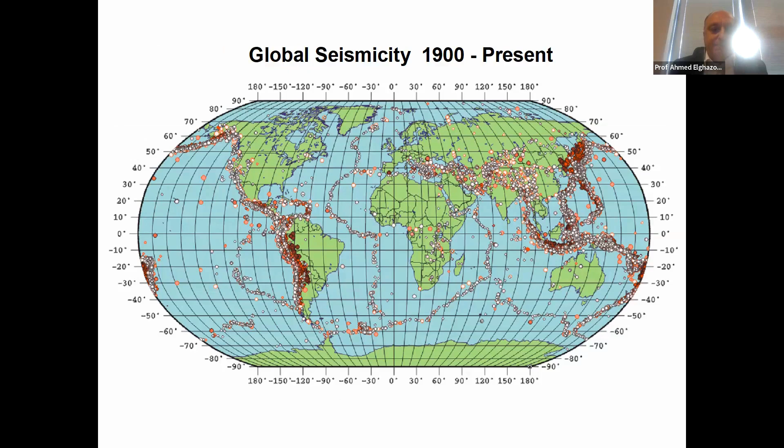I'll start with the hazard side, to see how we work out the loads that we design for in codes of practice. If you look at global seismicity, this is a map showing notable earthquakes that have happened over many years since 1900. You'll see that large earthquakes are clustered around what we call plate boundaries. The earth's crust consists of relatively rigid plates that move relative to each other, and large earthquakes happen at these boundaries, though notable earthquakes can also occur within the plates themselves.

But typically the very large ones occur at the boundaries. So why do we get earthquakes? If you look at a cross-section of the Earth, you will see it consists of different layers with different density and temperatures, and there are always materials continuously going from the inside of the core to the outside. As they get cooler, they try to go back inside, creating currents that cause tension, compression, or movement at the surface.

And that is the problem where this movement is held. You tend to build a lot of energy. Once you get this fracture over faults, you start generating quite a lot of energy, and this is expressed in terms of vibrations that translate over large distances.

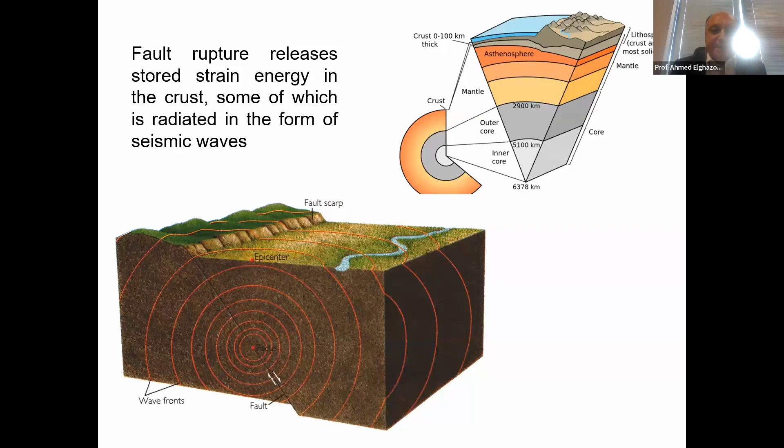This figure on the left shows a typical fault situation. This is the source here, and typically what we see on the surface is the fault scarp. Sometimes we don't really see the fault on the surface and it is buried inside. But what happens if you look at a typical fault situation?

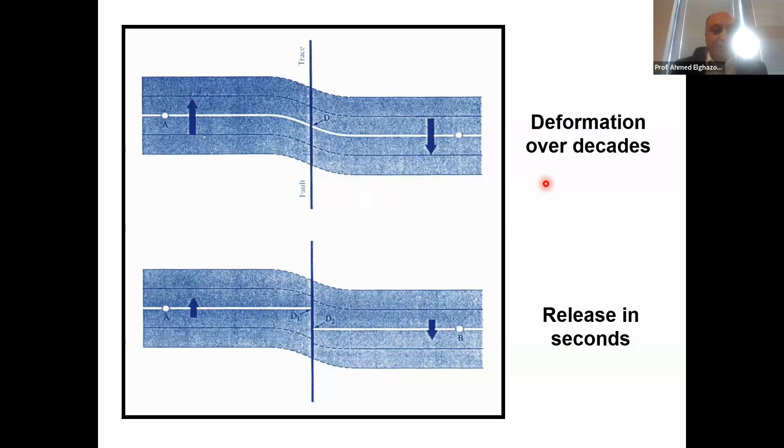In the top figure here, you start building this elastic energy within the fault. Then when it reaches its capacity, it snaps and releases very large amounts of energy within seconds. So it's built over decades, but then it is released in a few seconds, and that is the main mechanism of earthquakes.

Now, in many cases, you see it at the surface like this. Sometimes you have a vertical shift of a few meters, but the fault itself might be extending over tens or hundreds of kilometers. The larger this break within the fault, the larger the amount of energy, and the amount of energy is related to the magnitude that we characterize the earthquake with.

But it's important to realize that the magnitude is related to the event itself and not where you measure the vibrations. Of course, the vibrations will reduce as you go away from the source.

So what seismologists will typically do is study these mechanisms of earthquakes. They look at the nature and location of these earthquake sources, the frequency and magnitude of events from a particular fault source, and the likelihood of a certain magnitude occurring within a certain number of years. This is what we refer to as the magnitude frequency relationship for the source.

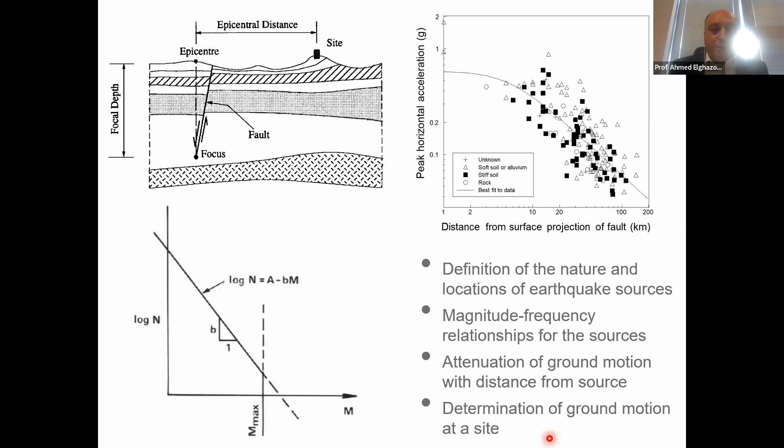As you go away from the source, if you're interested in a particular site, you get attenuation with distance, so vibrations tend to reduce as you go further from the source. But the degree of attenuation depends on the travel path, the soil conditions, and the topography of the site, among other factors that influence attenuation or, in some cases, magnification. At the end of the day, if you do this assessment for a particular site, you can determine the expected ground motion there.

Now, in many cases, your site will be influenced by more than one source, and hence you will have to do a probabilistic seismic hazard analysis, where you look at the possible influence of several sources and predict the hazard based on their combined influence. That's what we refer to as probabilistic seismic hazard analysis.

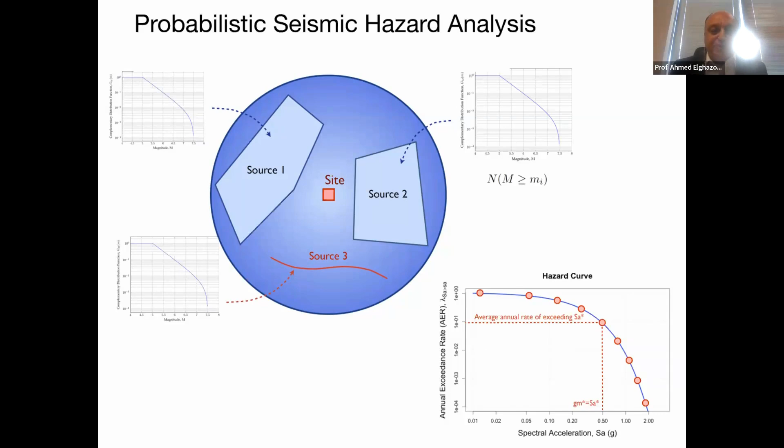If you have a very important structure that you're designing, you would actually have to do this kind of exercise for the site. But for the vast majority of normal structures, codes try to simplify the situation by doing the hazard assessment for a particular region in advance, then giving you seismic hazard or microzonation maps, which give the expected maximum accelerations for a region based on its location within the map. So things are quite simplified for normal, typical structures.

But I have to say that this is very, very uncertain. Seismic hazard assessment has a lot of uncertainty in it. What I'm showing here is a slide from a very well-known benchmarking exercise, where they got 13 experts to work out the peak horizontal acceleration at a particular site and the annual probability of exceedance of these accelerations.

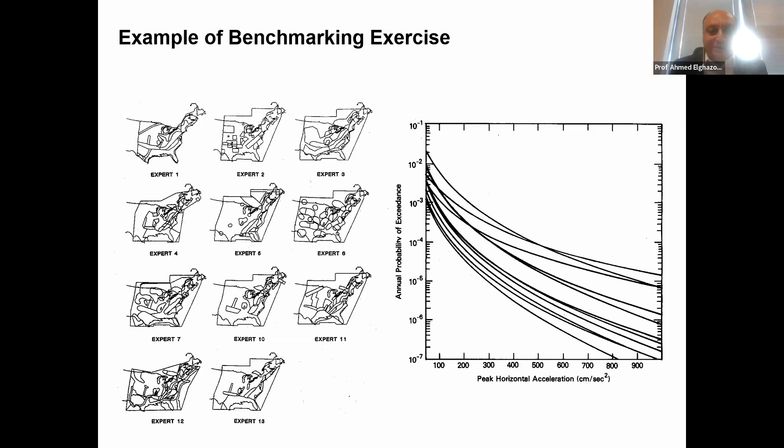You will see vast differences, maybe 2, 3, or 4 times difference between these different experts. So we are dealing with something highly uncertain. Hence, when doing our design concepts, we have to take into account this uncertainty in the loads we are predicting due to earthquakes. It's really important to realize that seismologists do their best in terms of predictions, but there are very large uncertainties.

Now I want to say a few words about Hong Kong. I haven't been there for a long time, but you hear a lot about the seismicity of Hong Kong, and there's lots of debate about the level of seismicity. It's clear that it is low to moderate. I'd say, in terms of risk, it's a moderate level. The estimated peak ground acceleration for an earthquake that might happen every 500 years is around 0.12g, which according to typical seismic codes is a moderate level of hazard—not low, but within the moderate level.

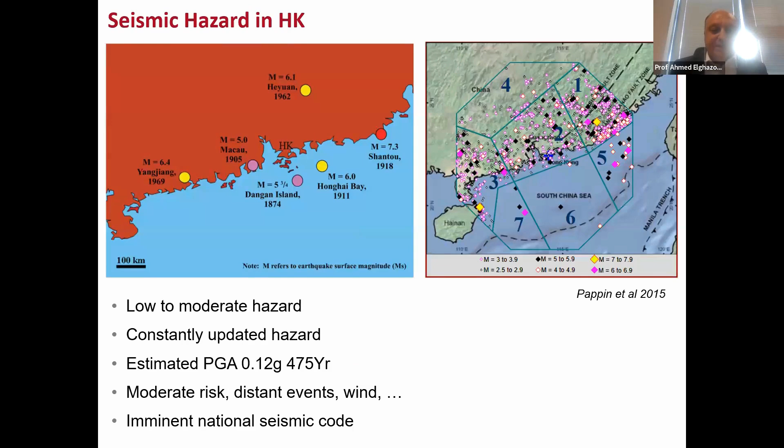My understanding is that there is a national seismic code likely to be issued quite soon, but there are quite a lot of issues involved. What I can say is that the hazard is not insignificant. It needs to be taken into account, particularly for important structures.

Now, having said all that, it's important to emphasize the importance of soil conditions. If you're at a site and looking at the underlying soil below the structure you're considering, the soil conditions play a very important role.

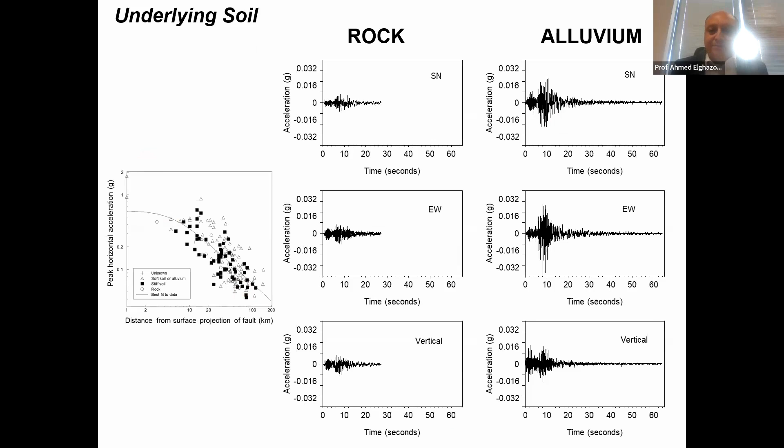What I'm showing here on the left and right are the measured accelerations, or vibrations, at very close sites, just a few meters from each other—one on rock soil and one on soft soil or alluvium. If you look at the accelerations, they are orders of magnitude different between the rock and the alluvium, because of the magnification effect you get from softer soil conditions. Although you get significant attenuation with distance from the source of the earthquake, the soil condition can amplify this quite significantly, and that can make a massive difference to the behavior and the loads acting on the structure.

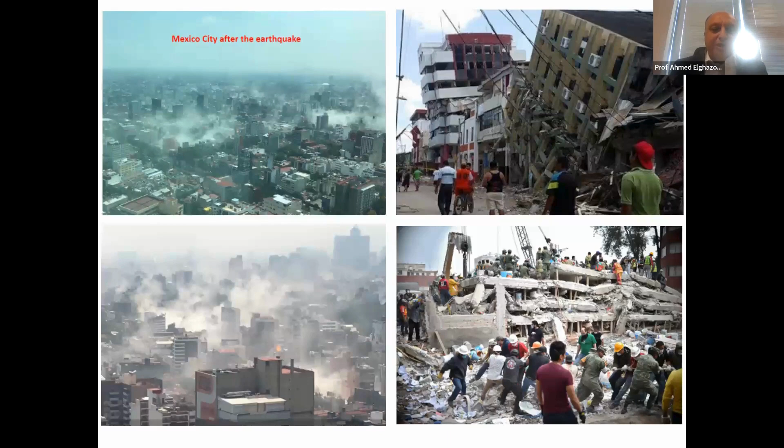A typical example of this effect is what happened in Mexico City. There was a very large earthquake in 1985, during which a lot of buildings were damaged. The important thing is that Mexico City is built on an area filled by soft soil in an old lake, so there's very soft underlying soil conditions which magnify the accelerations quite significantly. Interestingly, the 1985 earthquake was almost repeated on the same day in September 2017, with very similar levels of damage occurring again. It's a well-known effect that happens in many parts of the world.

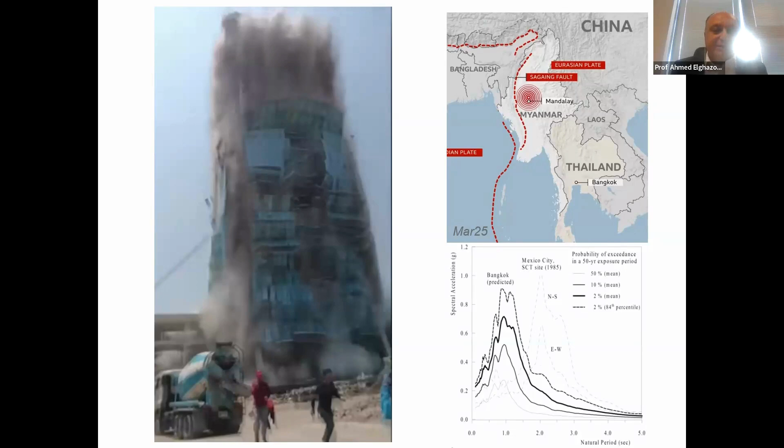Probably another close example in our memory is the collapse of a building in Bangkok in March this year, about 1,200 kilometers from the earthquake that happened in Myanmar. At 1,200 kilometers, you wouldn't expect significant seismic accelerations, but because of relatively soft soil conditions, there were very significant magnifications of the accelerations within this building—coupled with a lot of vulnerabilities in the structure. There were many issues in terms of design, materials, detailing, and so on, that led to the collapse of the structure.

At the end of the day, through networks we can measure strong motion in terms of acceleration, velocity, and displacement at locations distributed depending on where these instruments are. We can determine exactly the accelerations in the 3 directions—the 2 horizontal directions and the vertical direction. Typically, the vertical component isn't that important for design unless it's a very large earthquake and you're relatively close to the source, and also depending on the type and configuration of the structure. In any case, we have very good measurements now, and very large databases giving us what kind of earthquake strong motion records are available in different parts of the world.

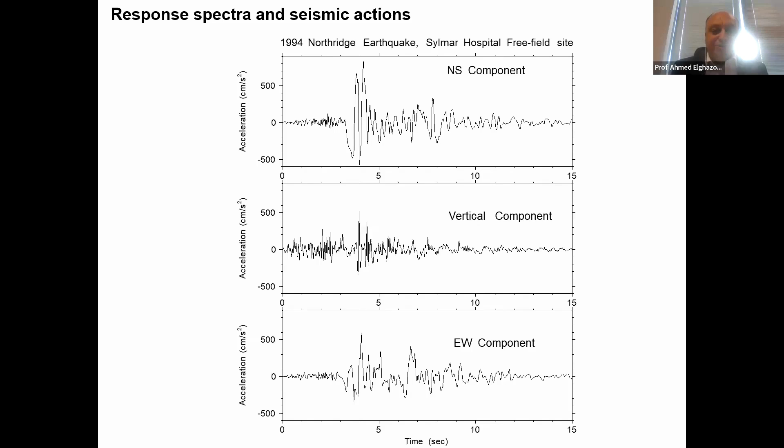Of course, the problem is we don't know the earthquake in advance, and we have to rely on a lot of predictions in order to work out what is likely to happen in a certain region.

While you can measure the accelerations in terms of the history of the acceleration, it is very convenient for simplified design to work out the forces based on what we refer to as the elastic response spectrum. If you know the acceleration record, you run a single degree of freedom system with different periods of vibration, look at the response, and plot the response acceleration against the period of vibration. You will get this elastic response spectrum.

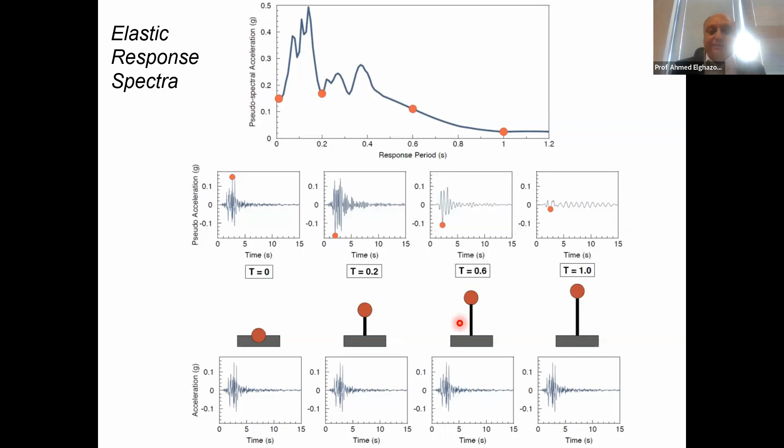That response spectrum is for a particular level of damping within the structure, and it assumes a single degree of freedom. Of course, real structures are rarely just a single degree of freedom, but it gives us a very good idea about the frequency content of that particular earthquake record. But again, this is if you know the record in advance.

So the acceleration response spectrum is quite useful in design. It really reduces the problem from a complex record of acceleration, velocity, or displacement into something much simpler. It takes into account the maximum acceleration, and in a way, the frequency content. However, it does not take into account the duration and the number of cycles.

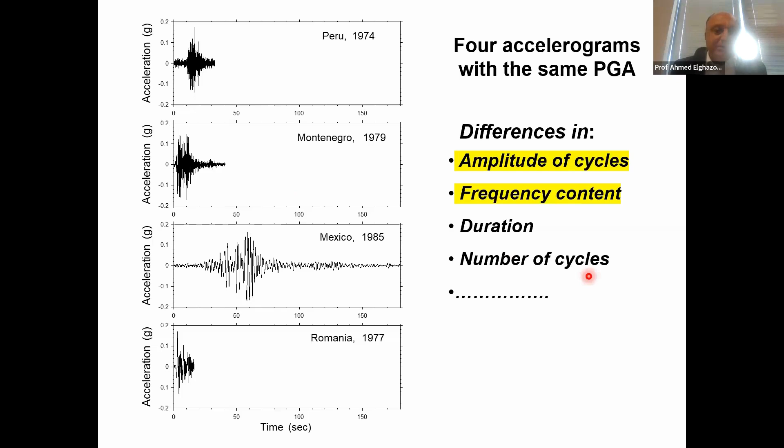What you see on the left here are 4 records of acceleration, measured records. They all have the same peak ground acceleration, but very different nature in terms of frequency content, number of cycles, and duration of the record. This probably becomes less important if you are looking at elastic response. When you get into nonlinear inelastic response, these kinds of effects are very important.

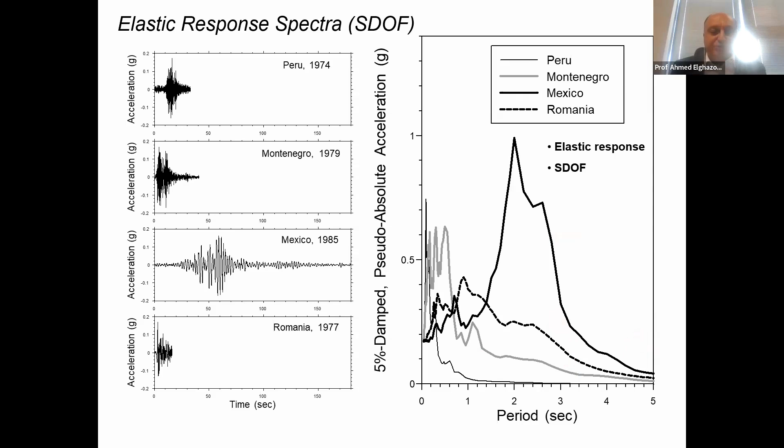Now, just to show you how these 4 records will look like in terms of the response spectra. These are the 4 elastic response spectra for a single degree of freedom system in response to these records. You can see that the spectrum captures, to a large extent, the frequency content depending on the period of vibration of the structure.

So the benefit of having this elastic response spectrum is clear: if you have a single degree of freedom system like this, you know the mass, you know the stiffness, and assuming you know the level of damping in the structure, then knowing the period, you can go and work out the response acceleration, which takes into account the magnification due to the dynamic response of the structure.

So the peak ground acceleration is magnified or attenuated depending on the frequency of the structure. The benefit is that you can then reduce the dynamic problem into an equivalent static problem by taking the peak ground acceleration, say from a hazard map, and magnifying it through the spectrum, assuming you know its shape.

By multiplying this spectral acceleration by the mass, you get the equivalent static force, which is equivalent to the reaction that is applied. So the vibration at the base is equivalent to the inertial force, or the equivalent static inertial force applied on the structure. So it does simplify the problem quite a lot.

The evolution of seismic codes has come effectively from this. At the very beginning, maybe 100 years ago, people were designing based on experience, and then it became taking a proportion of the weight and applying it as a lateral load. With time, they started taking into account the shape of the magnification, or the shape of the spectrum, and then it became more and more sophisticated, taking into account other aspects.

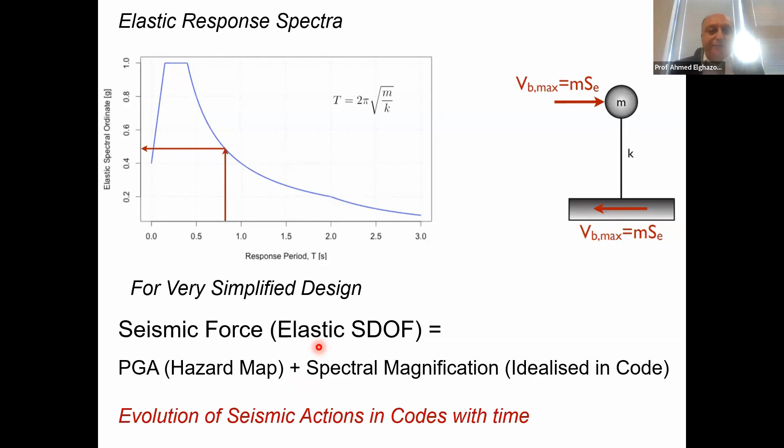If you look at any seismic code now, you'll see how it takes into account the fact that the structure is multi-degree of freedom, not single degree of freedom, and how it accounts for the structure not being elastic—it can involve nonlinearities and inelasticity and so on. But the essence of it really comes from what I'm showing on this slide.

So enough on the hazard side, and I hope it's given you a very brief idea of what we do in order to work out the loads on the structure. I'm going to focus more on the vulnerability side, and how, knowing the loads on the structure, we actually try to design structures in order to minimize the seismic risk.

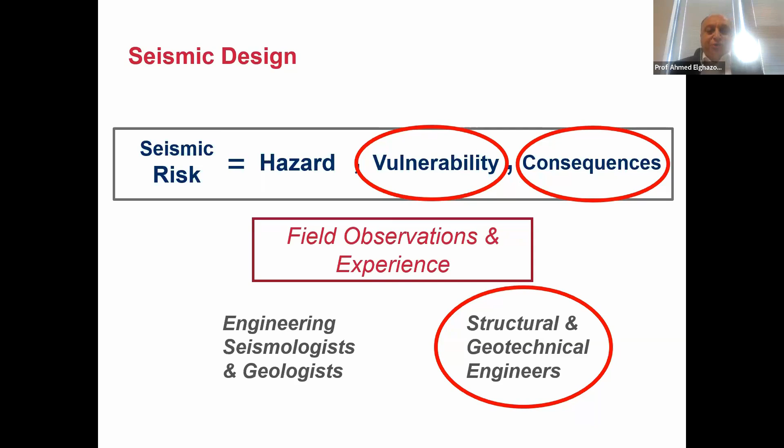And of course, we learn also from what happens to structures that behave very well. So when we go to the site after an earthquake, we don't only look at structures that are damaged, we also try to understand from structures that have behaved well during an earthquake.

And of course, we have to look at existing structures and how we can upgrade them in terms of strength, ductility, and so on. It's really important to emphasize that a lot of existing buildings have not been designed for any seismic code. Seismic codes started in a proper form maybe in the 1950s and 1960s, and then got introduced in other countries in the 70s, 80s, 90s, and even later. So there are a lot of buildings and structures that have not been designed properly and need to be upgraded all the time.

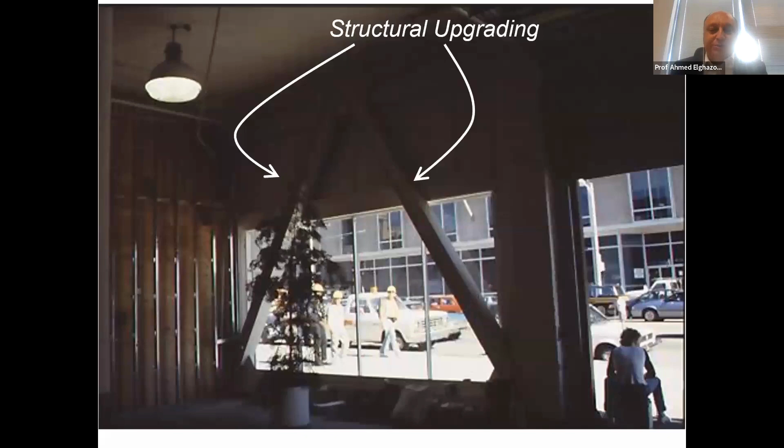And we also upgrade our codes, and we need to improve how structures perform under these new and upgraded codes. And of course, it's not only about buildings. We need to look at bridges. We need to look at implications of earthquakes in terms of landslides, in terms of liquefaction of soil. Fires typically occur after large earthquakes because you get failure in gas pipes and at the same time failure in water pipes, so you need to look at situations where fires are likely to occur after an earthquake. Even avalanches in some cases would occur because of earthquake effects.

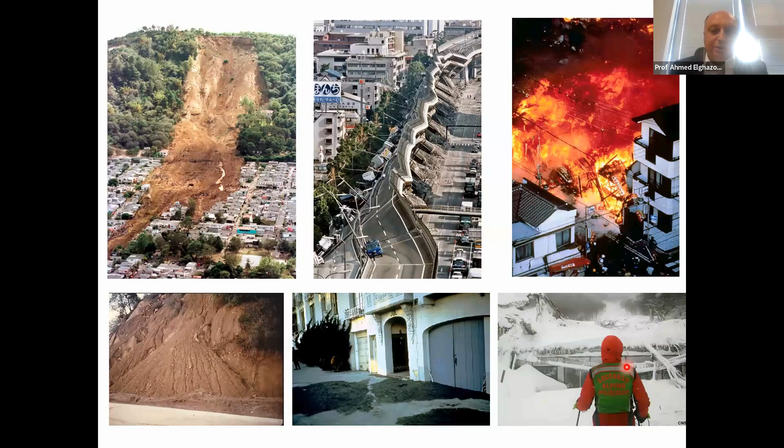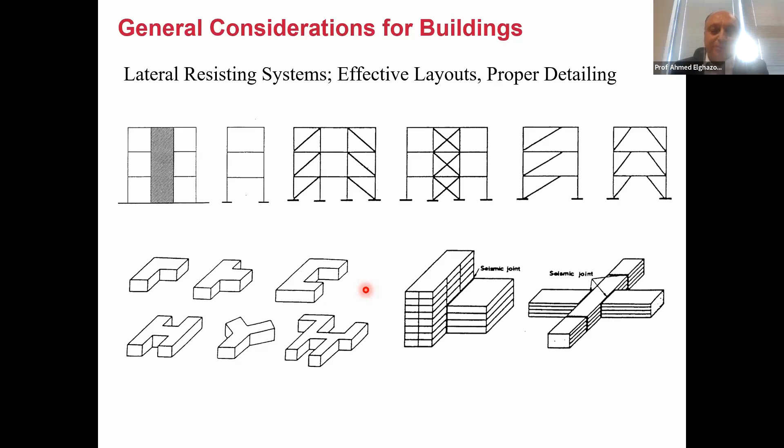Now, before I start looking at codes and what kind of concepts we adopt, it's probably important to say that a lot of the seismic resistance you build into structures, you can get initially without doing any calculations by following good practice - making sure you have a proper lateral resisting system in all directions of the structure, whatever this lateral resisting system is, and then trying as much as possible to follow relatively simple layouts. If not, codes will typically penalize you by asking for more detailed analysis and more involved design to satisfy the requirements. So we can design any structure, but if you use a relatively effective layout, it will make your task much easier from the very beginning.

Now, because we are dealing with loads which are quite uncertain, and we are also looking at probabilities of occurrence, what kind of return periods are we looking at? We need to look at that in a probabilistic sense, considering different situations. A typical situation is that we look at probability of occurrence for a design earthquake of 10% in an exposure time of 50 years, which translates according to a simplified Poisson's distribution as around 500 years - an earthquake that happens once every 500 years. In some codes, you start from an earthquake that happens 2% every 50 years, or 2,500 years. It really depends - the concepts are very similar, but your starting point might be different. You can start from a small earthquake and build upwards, or start from a large earthquake and build downwards. So the typical probabilities or return periods used are either 500 years or 2,500 years. Other seismic codes around the world might use different values.

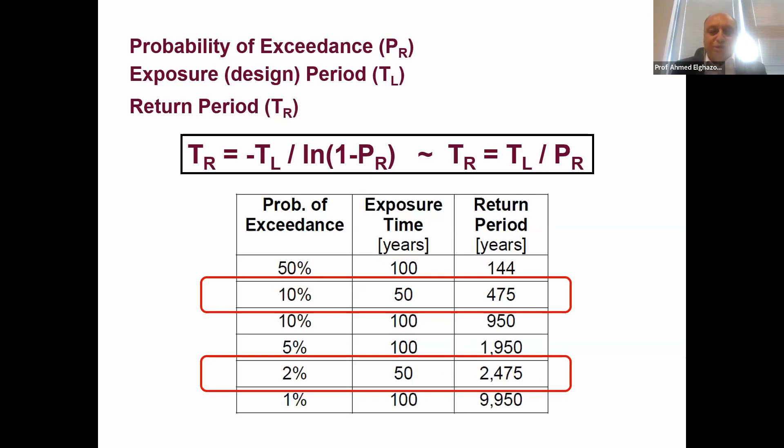So I'm going to start with what is typically referred to as performance-based seismic design. Now, this is not exactly what is in the codes - codes are much more simplified than this. Sometimes, if it's an important structure, we might follow a performance-based seismic design, which basically means we have to have a very clear understanding of what performance levels we are designing for, and also an understanding of the design earthquake or earthquake design levels we are dealing with in terms of return period or probability of occurrence. Codes, as I said, will inherently take that into account, but without sometimes being transparent about what assumptions are being made.

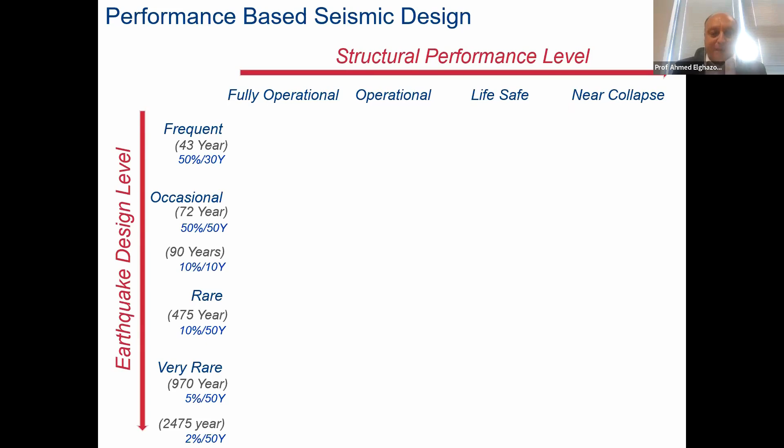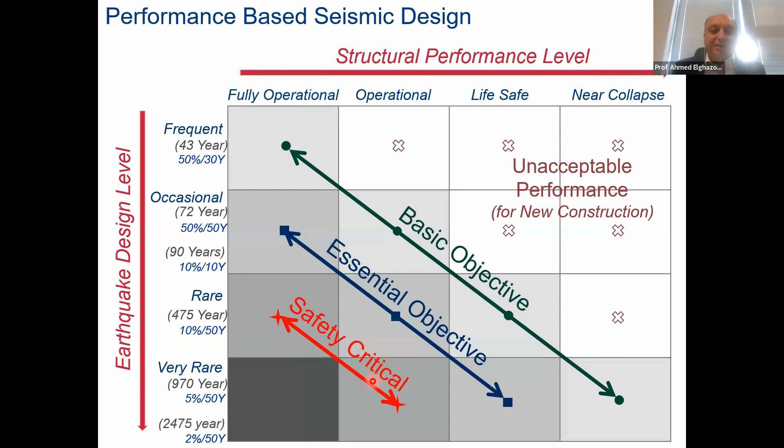This is transparent in performance-based seismic design, and it's a choice made by the designer, typically in consultation with the client. Codes, of course, will simplify that, as I'll show later on.

Now, how do we really translate that into structural performance? Under seismic loading, assuming a relatively simple structure, you have vibrations going in both directions. They are cyclic at the base, equivalent to inertial loads applied at the masses within the structure. So the load versus displacement response is what we call hysteretic cyclic response, and the area inside that is the energy dissipation within the system. But we often simplify that by looking at the envelope response, sometimes referred to as the equivalent static response.

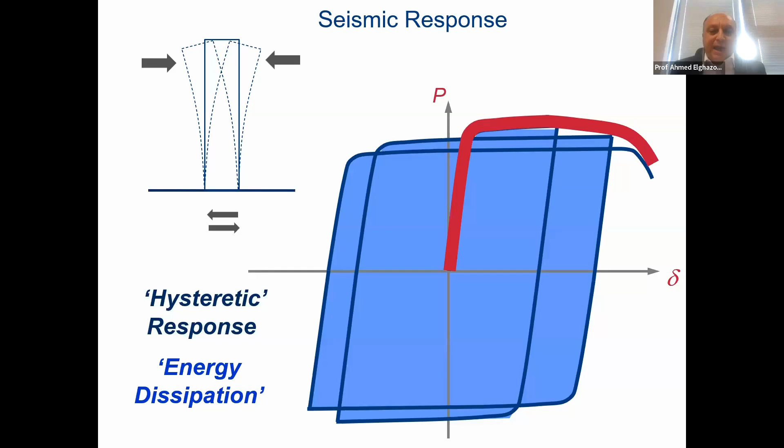We can represent this performance-based design in a figure like this: if you're pushing the structure at the ground in this direction, it's equivalent to an inertial load applied at the masses, and you can look at the deformation against the reaction at the base. As discussed before, for a relatively small, frequent earthquake, you make sure the structure stays within the linear elastic range. For a larger earthquake, you might allow some damage, maybe cracking of concrete and yielding of some steel. As the earthquake becomes larger, you might allow the structure to go into this level, but that comes at the expense of damage.

That means there's a cost in terms of replacement, a higher risk in terms of casualties, and a longer interruption of business while repairing the structure. If you don't want any of this, you have to make sure it remains linear elastic even at a very large earthquake, which is not very efficient — and it also cannot be guaranteed because we're dealing with very uncertain situations.

So there's a lot one can interpret from a figure like that. Now, code practice will simplify the situation, targeting essentially one of these levels, depending on the code. Different codes might follow different approaches. The typical one is to follow a life-safety approach for a 500-year return period earthquake, but then you do checks to see what happens at larger events and at smaller events.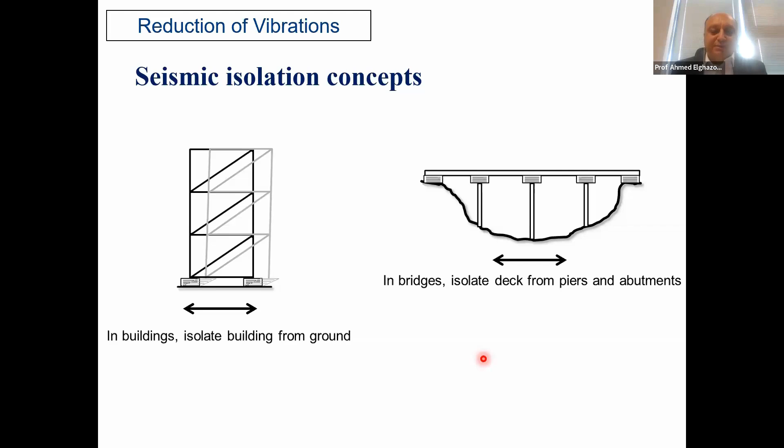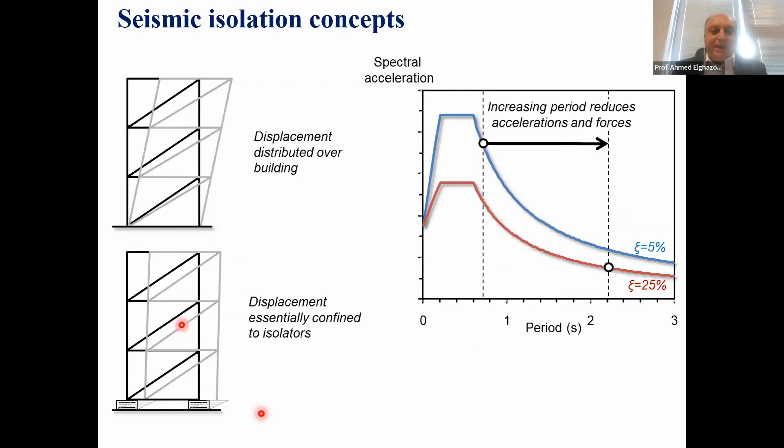The whole idea is that you are trying to isolate the superstructure from the vibration on the ground. Effectively, what you're trying to do is shift the vibrations within the structure from the areas that are likely to resonate and provide significant magnification of the loads. So you are basically increasing the period of vibration of the structure by having this flexible system, and hence reducing the magnification within the structure.

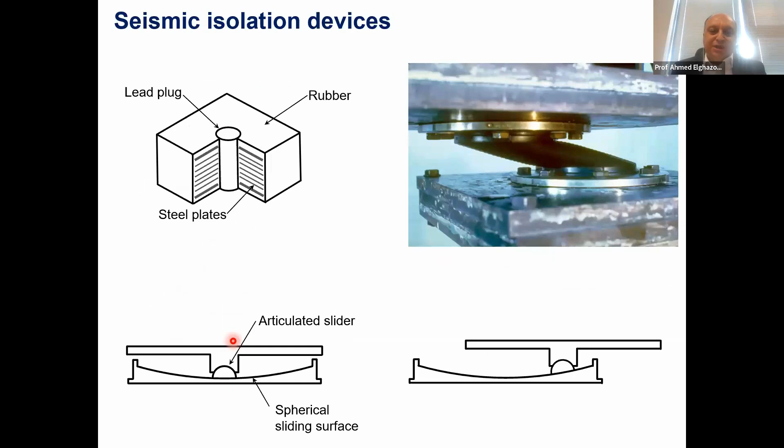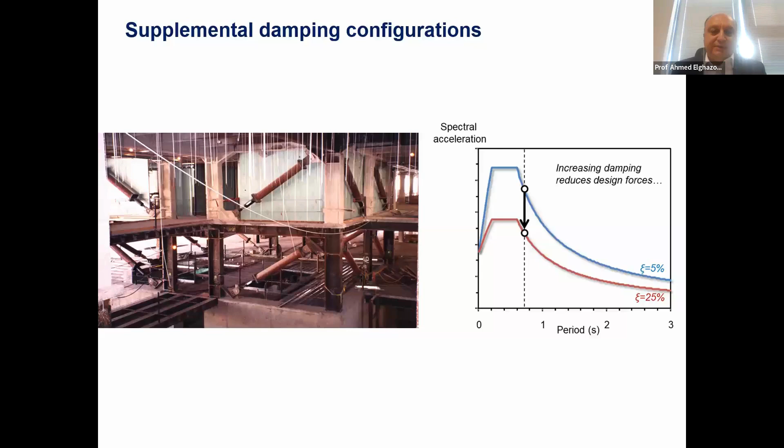These are some examples of isolators: rubber isolators with lead plugs, friction sliders, and so on. There are many other types of systems. You can also use supplemental damping systems, which increase the effective damping in the system. There are many other types I wouldn't have time to go through now, such as mass damping, and other active and passive vibration control systems, which get a bit more specialized.

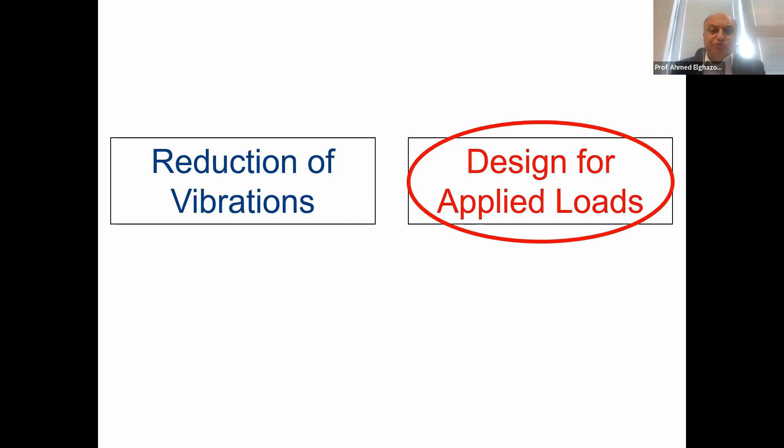Now, if you're designing for the applied loads, which is the more common approach, then what you will try to do, as I mentioned, is follow this approach where for relatively frequent events, you make sure the structure remains at very low levels of damage. If you go for a rare or unlikely situation, you might accept some damage in the structure, at the cost of significant replacement cost or interruption, and so on.

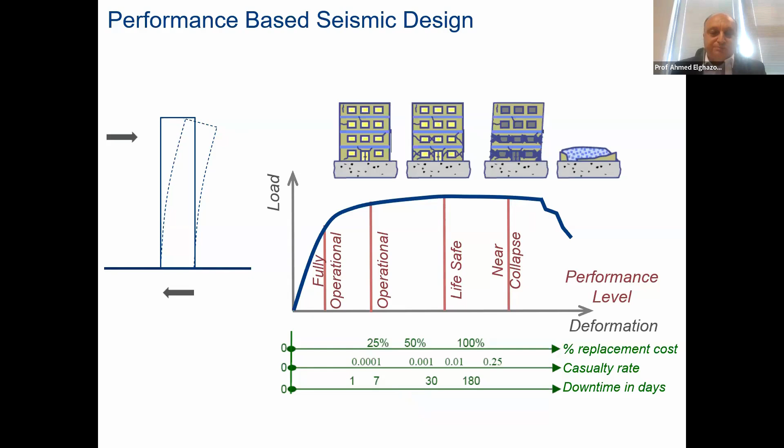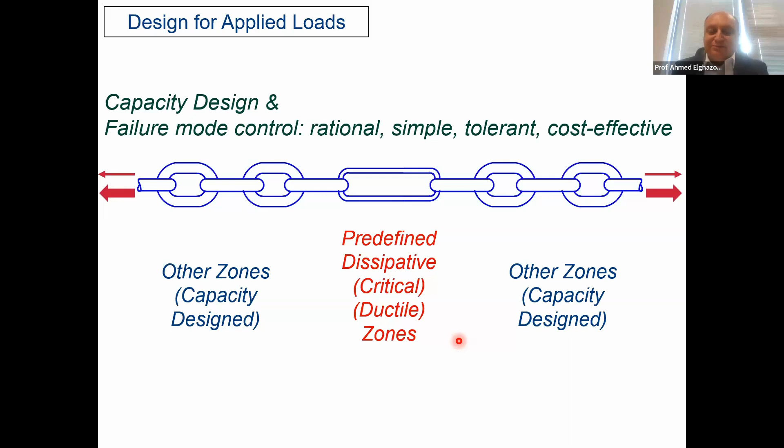All the other elements are capacity designed, meaning they are designed for the maximum possible forces that can be transferred from these ductile zones. So it is an efficient, simple, and cost-effective approach, but it makes sure you apply the capacity design approach properly, with ductility provided within the areas where you can dissipate energy. This approach was developed in the 1970s in New Zealand and then started being applied to other types of structures. It is now the common approach used in seismic codes all over the world.

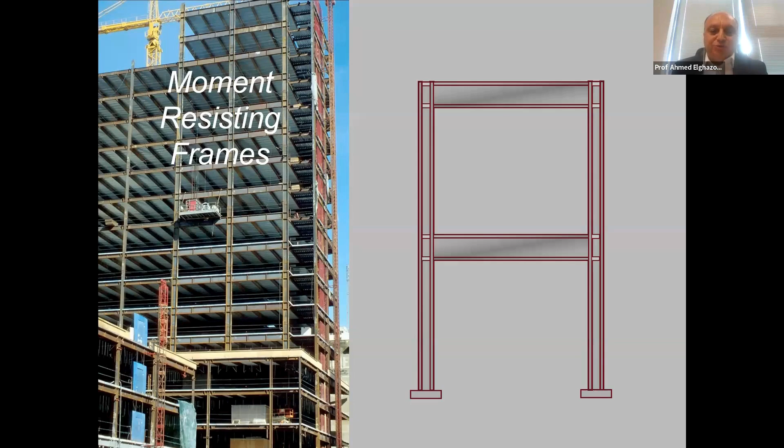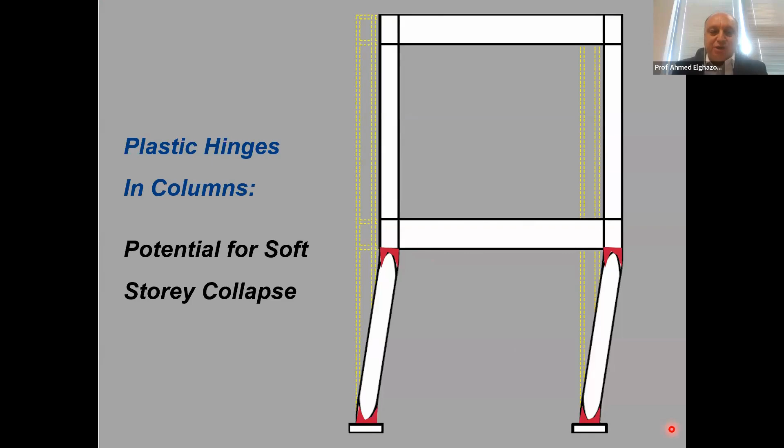So for example, if you have moment resisting frames as a lateral resisting system, what you try to do is make sure your dissipative zones, or critical zones, are at the ends of the beams. Everything else is capacity designed, and that's the plastic mechanism you are designing for. You avoid having a situation where you get plastic hinges at the ends of the columns, because that can lead to soft story behavior and early collapse of the structure.

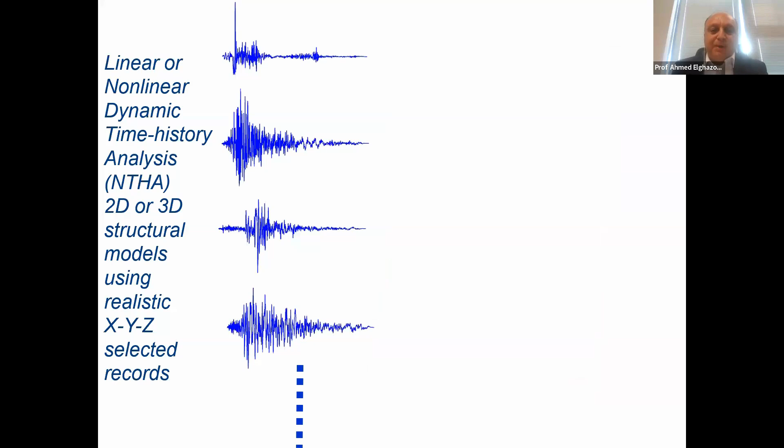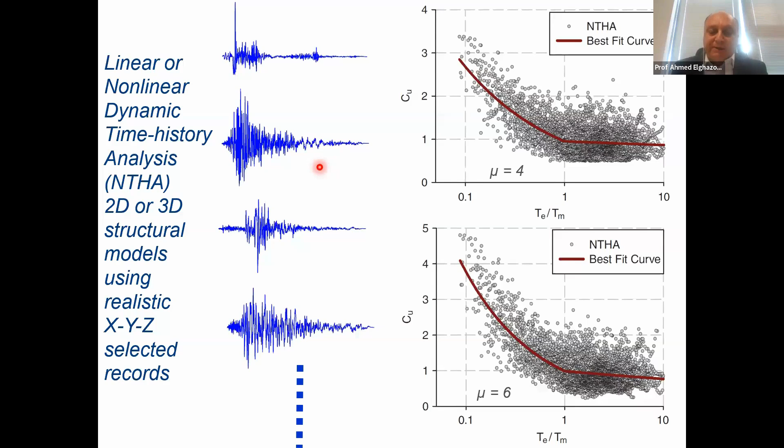In research, we do quite a lot of detailed time history analysis, dynamic analysis, which is time consuming, but it allows us to come up with simplified approaches that we can use for typical structures in normal practice. So in typical structures, we normally wouldn't do nonlinear dynamic time history analysis. We simplify the situation a lot based on calibrations done on a lot of analysis, but for important structures, we might still have to do verification using nonlinear dynamic analysis.

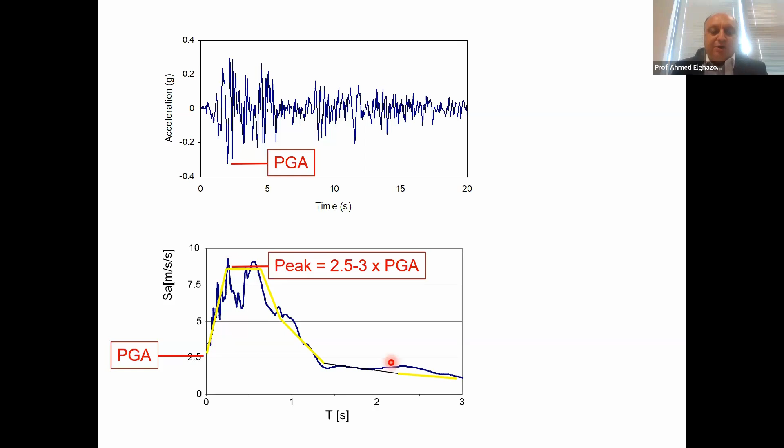As I mentioned before, because we don't know the earthquake in advance, what we come up with in the code is a response spectrum, represented by this yellow line here, which is an idealization of the expected shape of the spectrum you are likely to get in that particular region. So it is all simplified, but it is calibrated properly based on a lot of detailed analysis.

Now, the other thing you need to take into account is that in practice, you don't want to do nonlinear analysis. So how do you take into account the fact that you are allowing ductility and inelastic behavior in the structure? This is what we refer to as a behavior factor, force reduction factor, or force modification factor, depending on the code you are using.

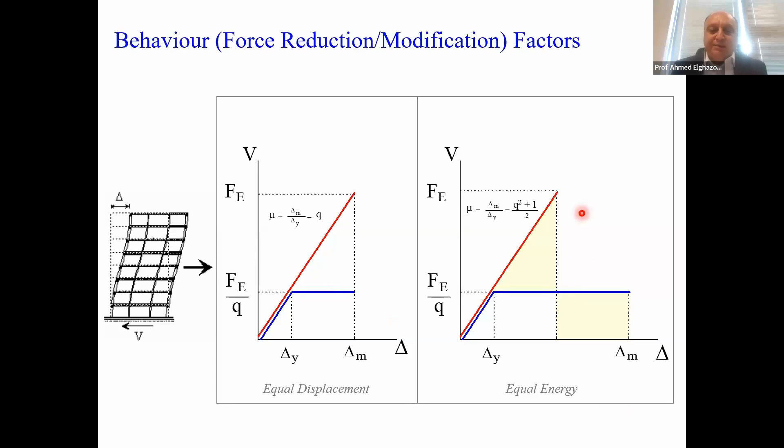This is really a simple approach, very crude but calibrated for typical structures, where rather than designing for elastic forces, you design for smaller forces, and make sure you account for the ductility demand that results from designing for smaller forces than the elastic forces induced in the structure. This is embedded in normal practice, and effectively, instead of designing for the elastic response spectrum, you can design for smaller loads, provided you take into account the ductility demand arising from this. So effectively, you are designing for smaller forces, and hence you get a more effective design.

So at the end of the day, for the rare event, for the design earthquake, if you are in relatively high seismicity, it doesn't really matter too much if you are in low seismicity. If you are in high or moderate seismicity, you need to provide ductility in the structure. So how do you provide ductility? Again, the codes will give you a lot of information and detailing requirements to make sure that you have enough ductility, consistent with the level of reduction of forces taken in the design.

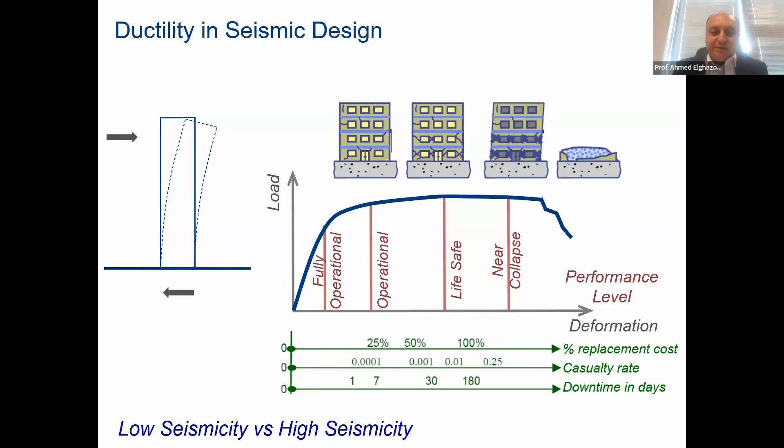I wouldn't go into great detail because of time, but if you are dealing with a reinforced concrete structure, for example, you need to make sure you prevent shear failure because it's brittle, sudden, and doesn't really provide a lot of ductility. You have to make sure beam to column joints are properly detailed because they can be quite vulnerable. You need to make sure you are providing adequate detailing - forget about seismic, proper detailing in principle in terms of anchorage, joints, concrete quality, and so on. Concrete confinement is very important because it is one of the key parameters that provides ductility within a concrete element.

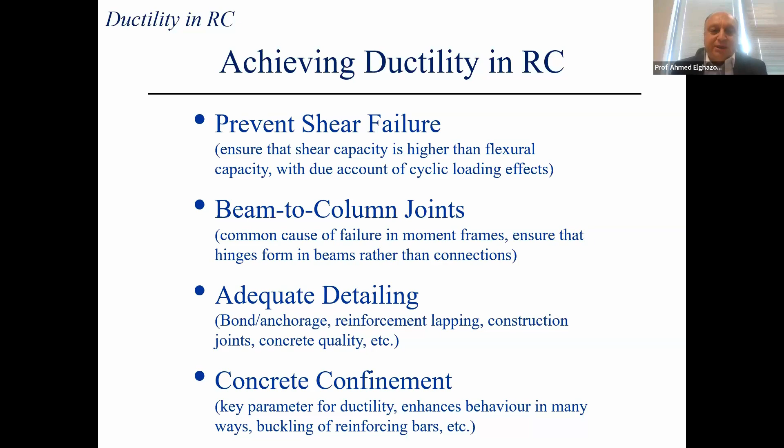The same again for steel. There are certain things you have to follow in order to make sure you have ductility, make sure you have proper detailing of connections. Welded connections have been shown to be quite vulnerable, and it has resulted in significant changes in seismic codes of practice in recent years. You have to make sure you avoid early occurrence of local buckling, because it is very likely to be followed by low cycle fatigue fracture under cyclic loading. Bracing members can be vulnerable because of overall buckling combined with local buckling, and also issues related to connections of bracing members. So all these are very important in order to provide sufficient ductility within the structure.

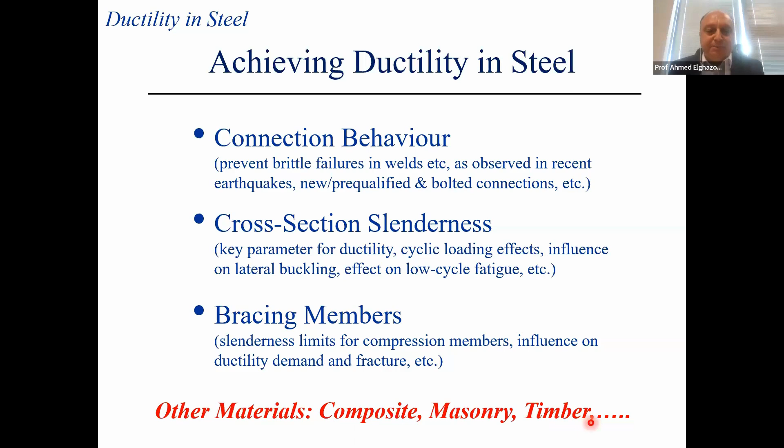Of course, I can go on in terms of composite structures, masonry, timber, and so on. Codes of practice, depending on which code you are looking at, will give you information on these as well.

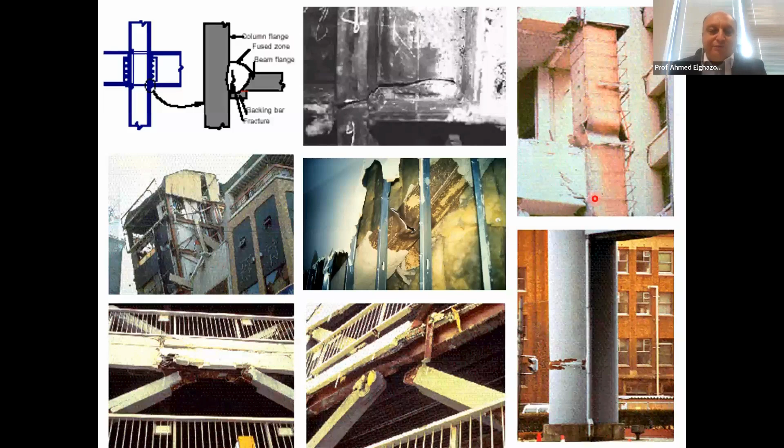Again, these are some implications of not having enough ductility in steel structures, in terms of fracture due to local buckling, failure of connections, failure of braces, and so on.

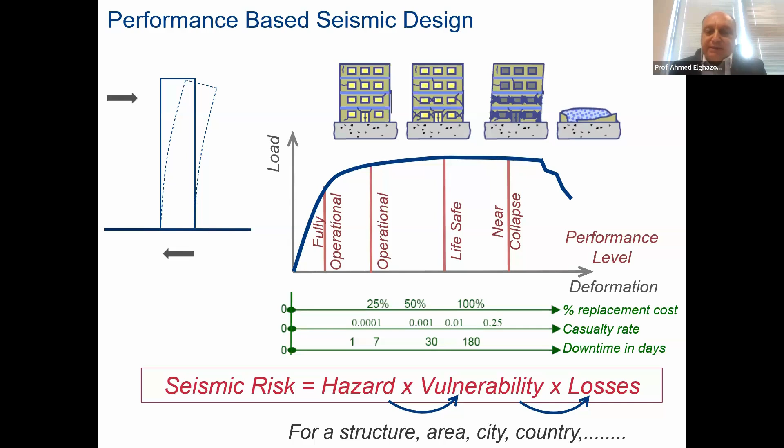Now, another thing to highlight is that when we are dealing with risk, we are not necessarily only dealing with a single structure. Sometimes we are looking at an area, a region, a city, or trying to assess risk in a country. We do a lot of these studies in terms of loss assessment due to possible earthquakes. I'm just going to show you an example from my home city of Cairo.

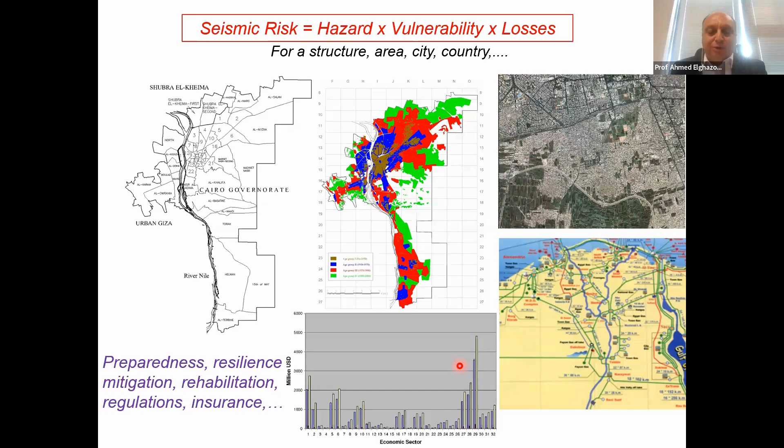This is one of the studies we carried out. It involves a lot of satellite images, understanding of the hazard, looking at the building stock, looking at networks - gas networks, electricity, transportation networks. But we're not only looking at direct damage, we're also looking at indirect losses to the economy in terms of different sectors of the economy and so on. These kinds of studies are very important in terms of preparedness, mitigation, rehabilitation studies, regulations, and also insurance. These studies are now a very important part of the research that we do.

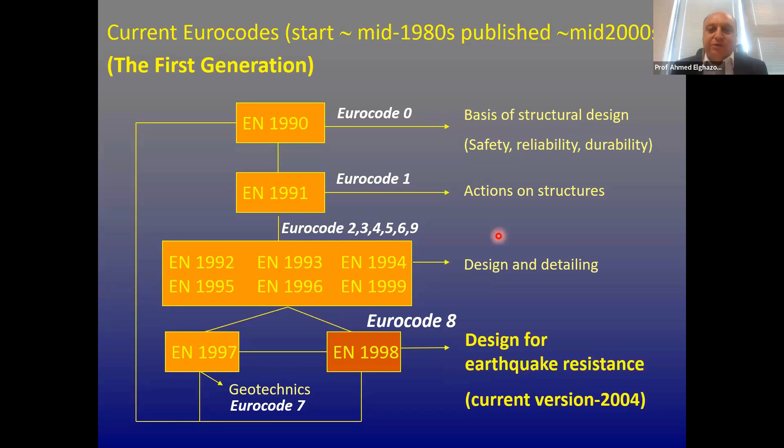Now, I'm going to finish by giving you a flavor of what we have in seismic codes. I'm going to focus here on the Eurocodes, partly because I've been involved for many years in their development, and also because my understanding is that the seismic codes in Hong Kong, once available, will be to a large extent based on the Eurocode. So this just gives you a flavor of what is in the code. Of course, the structural Eurocodes involve a number of codes. The one I want to focus on here is Eurocode 8, which is the design for earthquake resistance. But of course, in order to undertake design according to Eurocode 8, you have to have an understanding of the other codes as well.

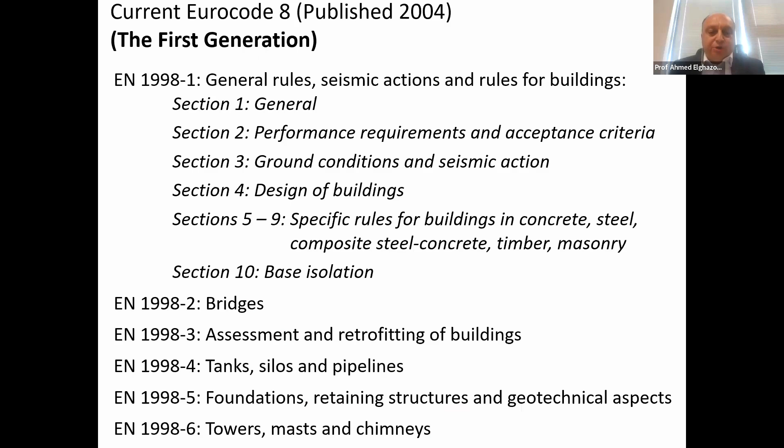Now, this is just an outline of the contents of Eurocode 8, and this is the current Eurocode 8, which is in force. This was published in 2004, so over 20 years ago. You can see the different parts of the code: general rules on seismic actions for buildings, bridges, assessment of existing buildings, tanks and silos and pipelines, foundations, tower masts and chimneys, and so on.

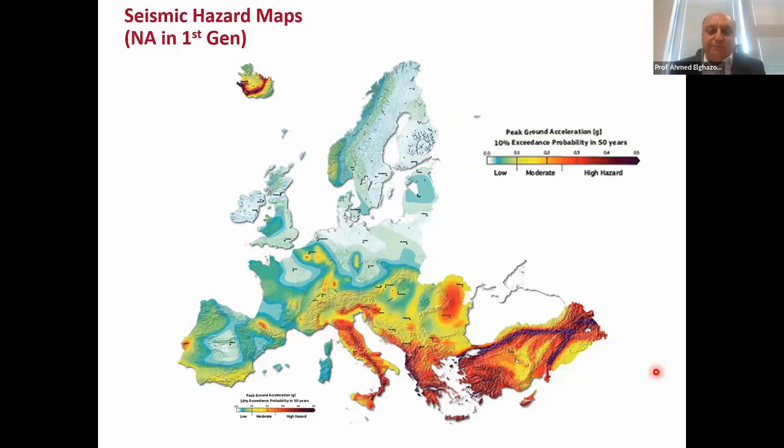Each country within Europe, and the code is also implemented in other countries outside Europe, would have its own national annex where it provides some adaptation, some changes of certain parameters. There isn't a current Eurocode map for Europe which is enforced, but the new code will have a map. Each country provides its own national seismic hazard map.

Now, I just want to highlight this. According to Eurocode 8, if you have peak ground acceleration on rock which is less than 8% G, that is considered to be a low seismicity region. If you have a peak ground acceleration on a rock site for a 500-year event, less than 4% G, this is considered to be a non-seismic country.

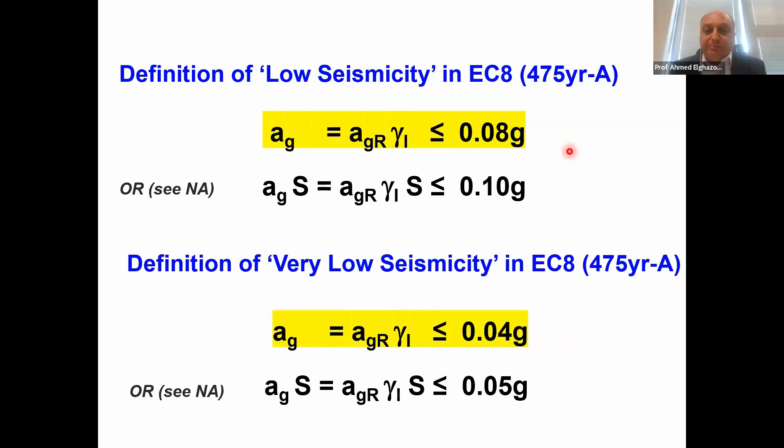Now, if I relate this to, let's say, the 0.12 G that is typically indicated for Hong Kong, then it wouldn't be a low seismicity region. It would actually fall into the moderate seismicity region.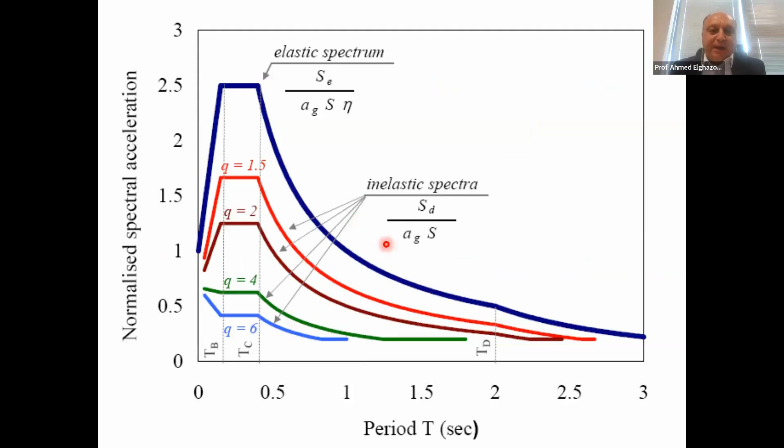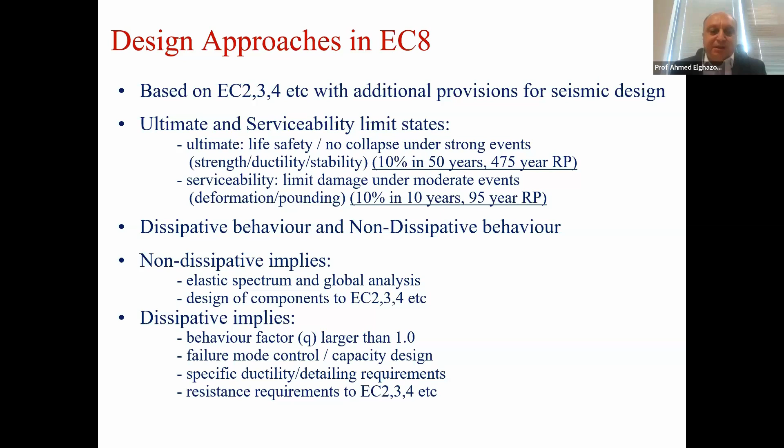And of course, the code will give the shape of the spectrum and also will give guidance on the behavior factors that you can use, and will give you some indication of what kind of earthquake you follow for the ultimate situation and for the serviceability situation, and when you use elastic design, when you follow capacity design and inelastic behavior.

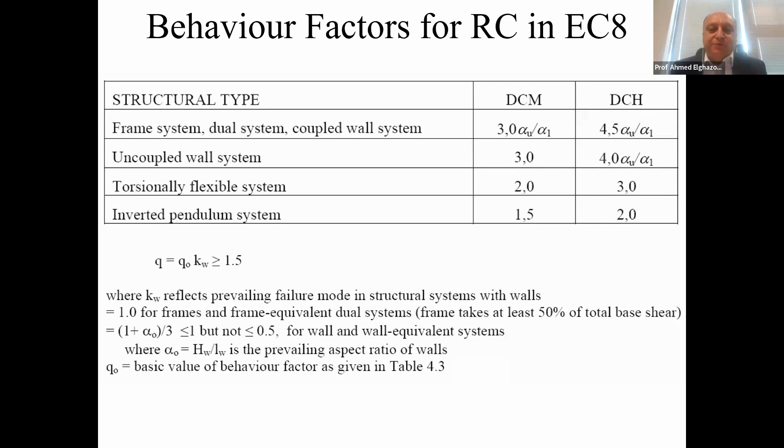And then it will give you some guidance on what is the maximum behavior factor that you can use for reinforced concrete, for steel structures, and so on, for masonry, timber, and so on.

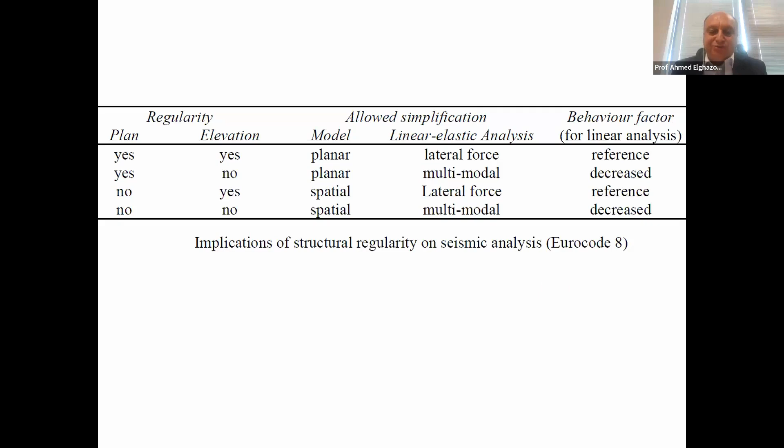And as I mentioned before, the regularity of the structure in terms of the shape of the plan, the shape of elevation, and so on is very important, because that will determine the level of analysis that you need to use, and also the level of behavior factor that you can use. So it has an implication: the regularity that you use in the structure has an implication on the analysis and the level of plastic deformation that you can allow in the structure.

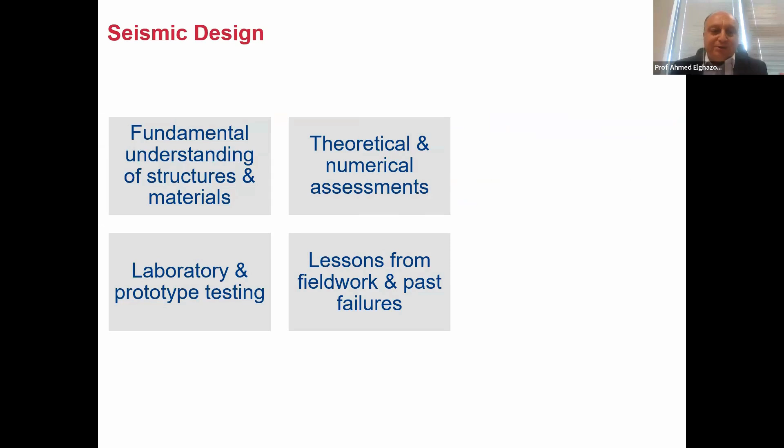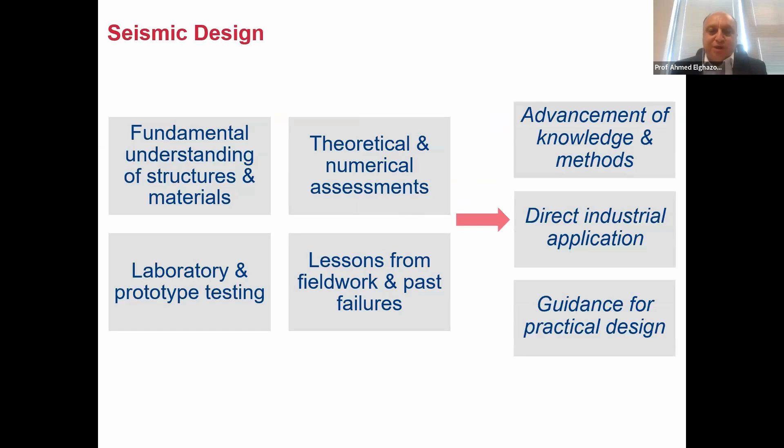Now, of course, this code has been produced 20 years ago. Between then and now, there has been a lot of work in terms of understanding of behavior, theoretical and numerical research, laboratory testing, lessons from recent earthquakes. And that builds into much better understanding of the behavior, direct application in industry, and guidance in practical design. So we are always upgrading our codes of practice.

And now we are developing what we call a second generation of Eurocode 8, which is almost ready. It's likely to be enforced in 2028.

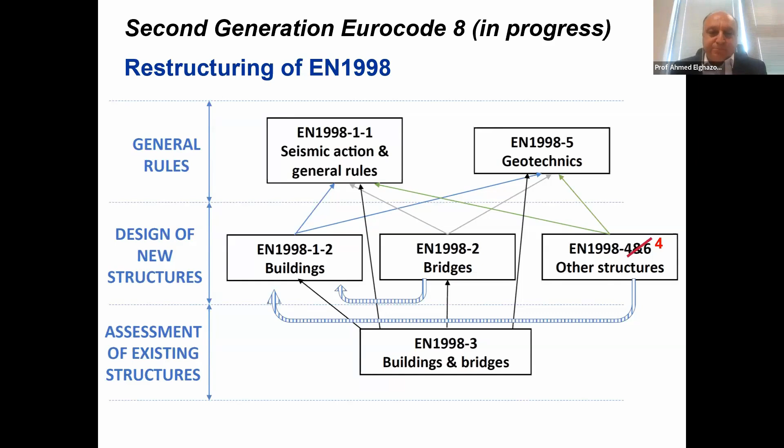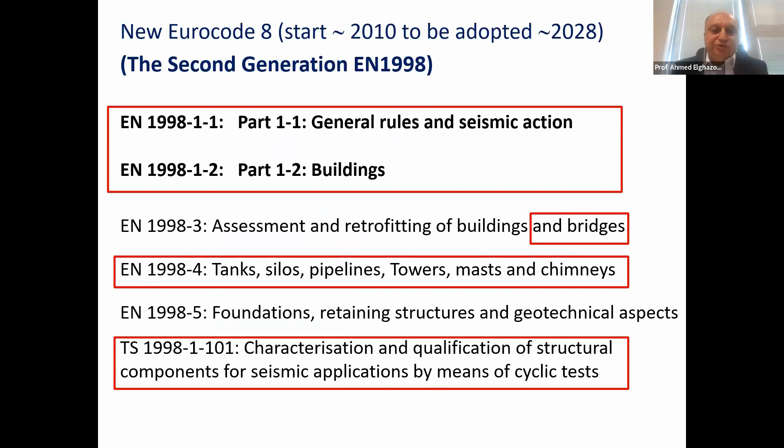So it has some restructuring of the code, and it has a lot of new parts in terms of assessment of existing structures, the types of structures involved, the type of supportive testing that you can do for the codes. There is a lot more on energy dissipation systems, base isolation, non-structural components, different types of analysis, and a lot more on different types of materials that you can use in structures. So significant transformation and addition within the code.

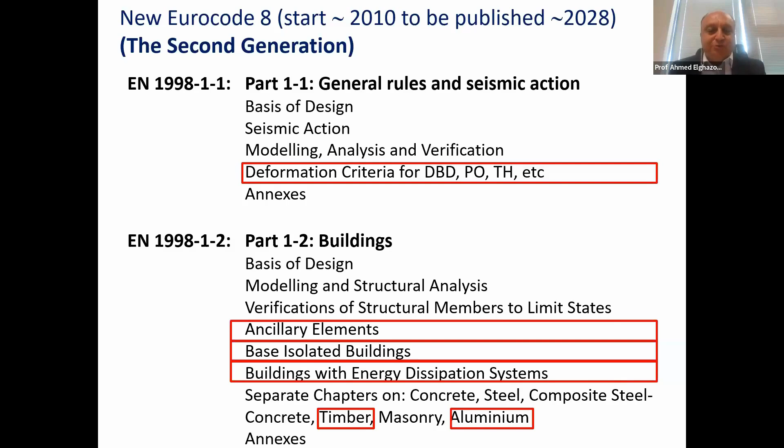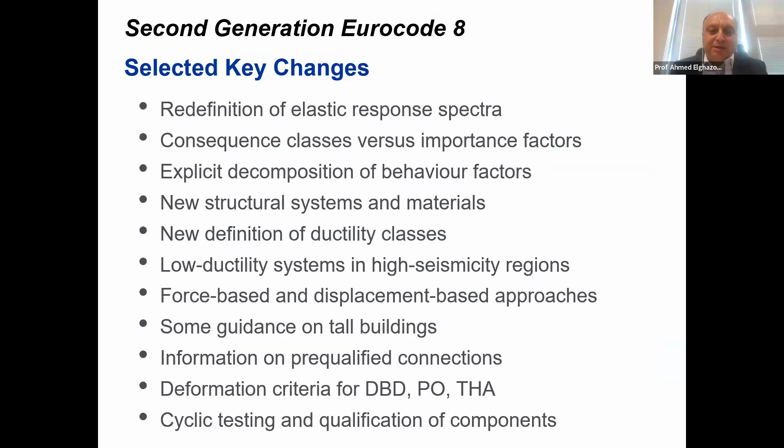And this is because of the knowledge that we have built and learned over the last 20 years or so. I'm not going to go through the key changes, but you can find this in a lot of guidance documents that are going to be available.

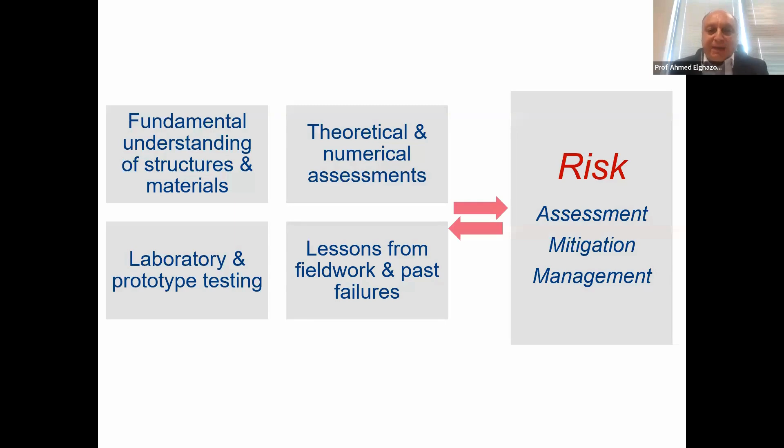And at the end of the day, what I said at the beginning is that because we are dealing with a lot of uncertainties, it's really all about trying to reduce the risk. So we're trying to assess the risk, mitigate the risk, and manage the risk from earthquakes.

You hear the word resilience quite a lot, mentioned as quite fashionable now, but it's really, at the end of the day, very much related to what I've been talking about. Resilience is really how quickly you can recover. So if you have damage in a structure due to earthquakes, how quickly after the event itself can you recover the use and function of the structure. Of course, if you allow very large damage, then this will be very low resilience, and you'll have to wait for a long period until you recover the structure.

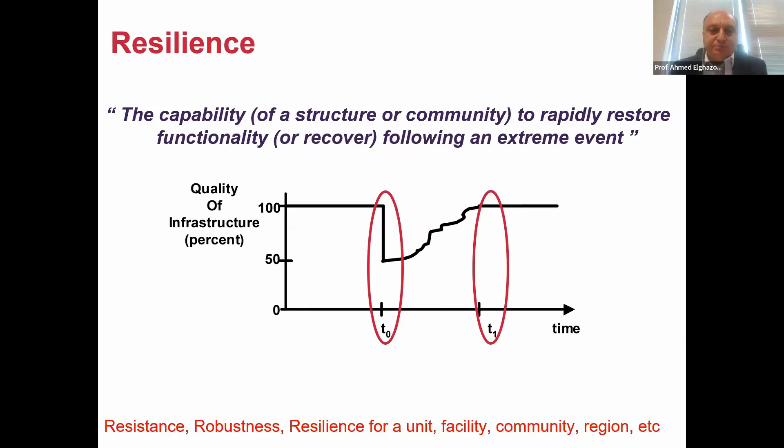So if you want a high level of resilience, you have to minimize the damage that you get in the structure. And of course, you hear a lot about disaster resilience. Once you have an event which is influencing a very large number of people, then of course it becomes a disaster.

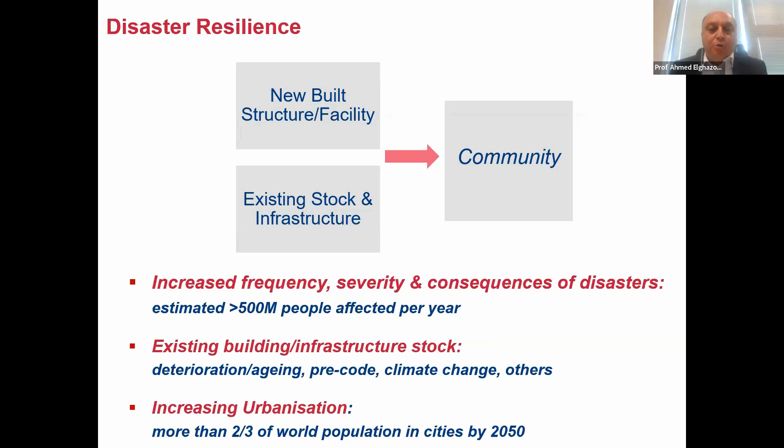And this is on the rise, and it's on the rise because of many reasons. There is a lot of aging and deterioration in structures. A lot of structures are falling into what we call a pre-code situation. They're not really conforming to current codes. Climate change is not helping, and it's increasing the pressure on the performance of structures. There is a lot of urbanization increasing—it is expected that 2/3 of the world population is going to be living in cities, and all that is adding to the increased risk from earthquakes and other disasters.

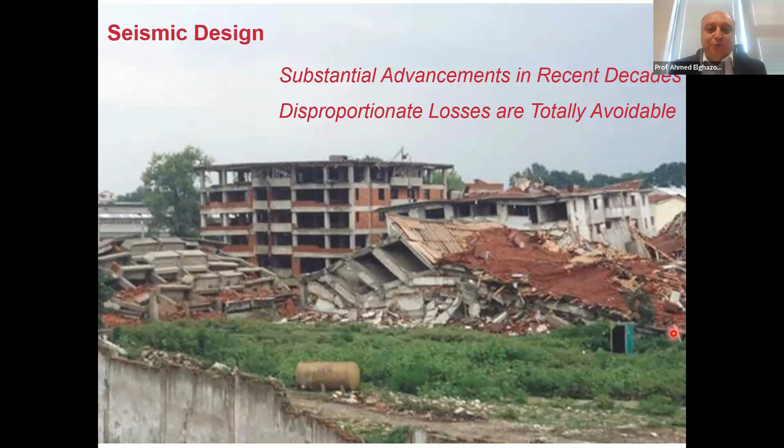So I'm going just to end by this slide and really emphasize this point: when I started working in earthquake engineering maybe 30 years ago, the difference in knowledge is just massive. So I would say that now any kind of disproportionate losses, like the kind of things we are seeing in this slide here, is completely avoidable, and it really should not happen. And a lot of the things that we see in the media about very large widespread damage due to earthquakes is avoidable, but for many reasons, in many cases, it does unfortunately happen. But the state of knowledge is so advanced now compared to 30, 40, 50 years ago, and there is really no excuse for having poor performance of structures in earthquake.

I'm just going to end here by providing you with some references. If you need to read a bit more about this, I'll just stop here, and thank you very much for your time.